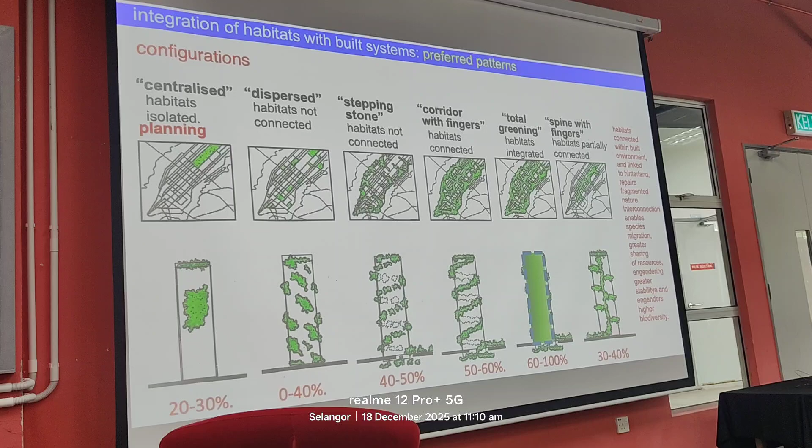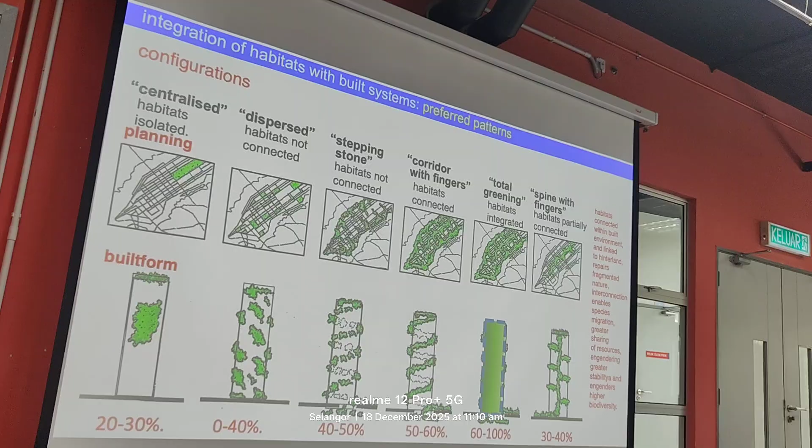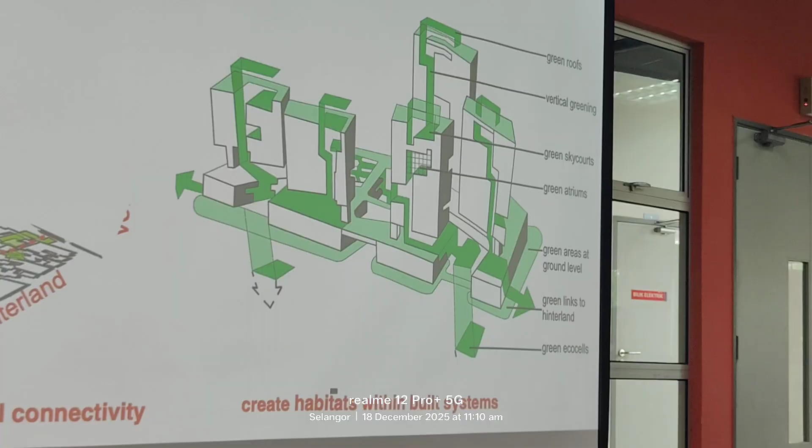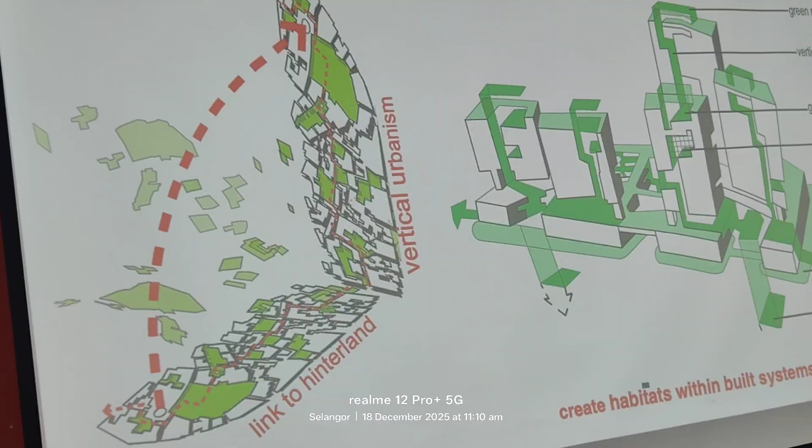And then within the buildings we create habitats as well. Green walls, vertical green areas, green skycourts, and so forth. But connectedness is very important, so we should try to connect the greenery both at the ground plane and with the vertical. So in nature, everything's connected. What human beings do is that we chop up nature, we fragment it.

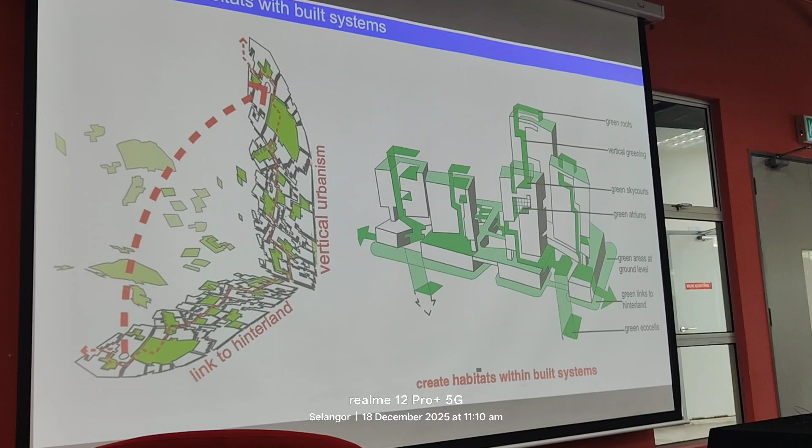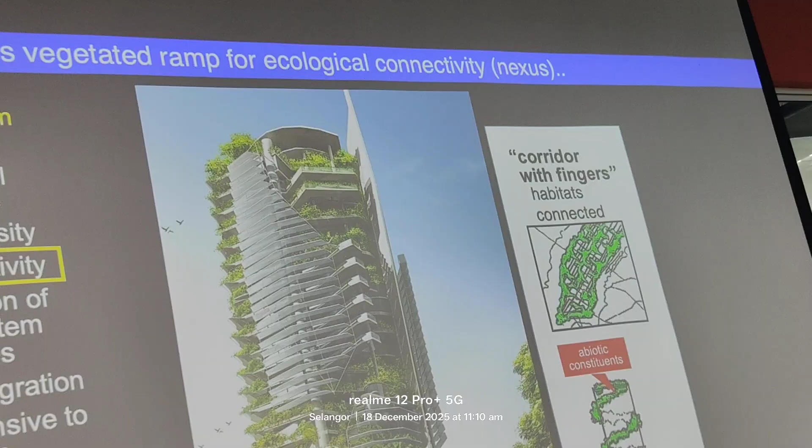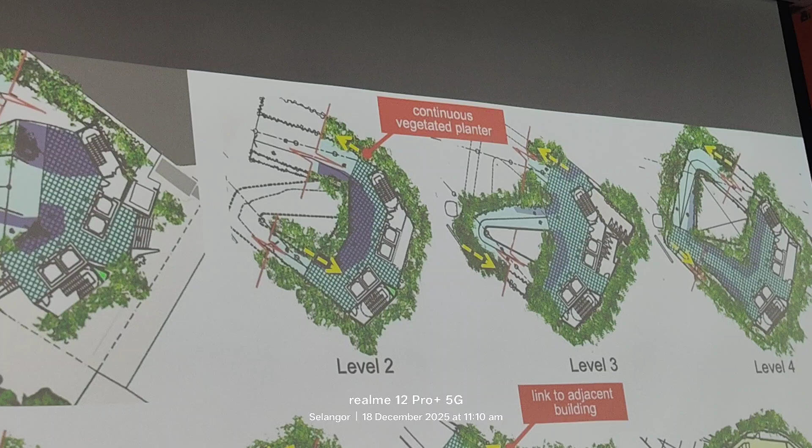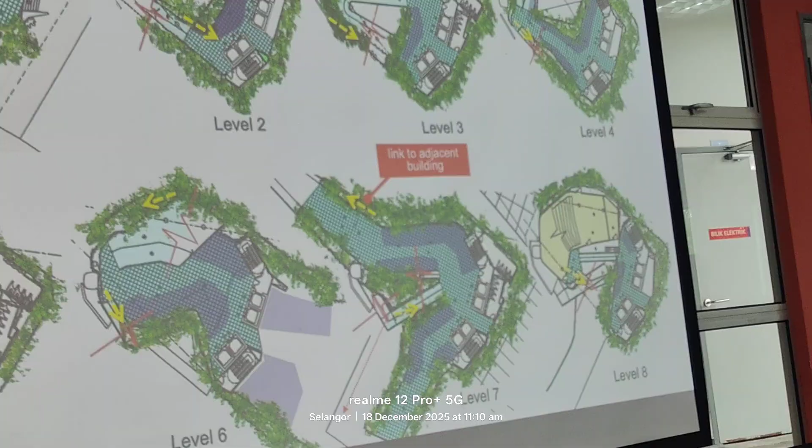And so with these ideas, I started to design experimental buildings. This is the EDITT Tower that we designed in Singapore. It's not built, but it started to look at connectivity, how vegetation could be linked within the building. These are the plans of the building. The idea was to have a vegetated ramp that goes all the way around to the top of the building, and in between would be the usable spaces. We designed this as a cultural building with museums, with exhibition areas, with cafes and restaurants.

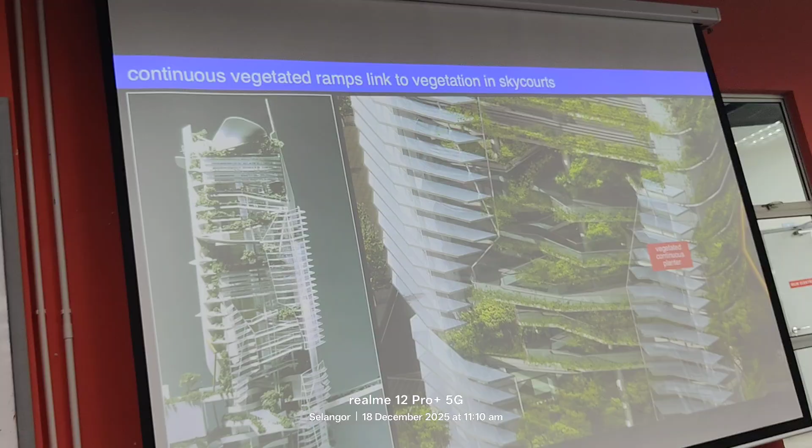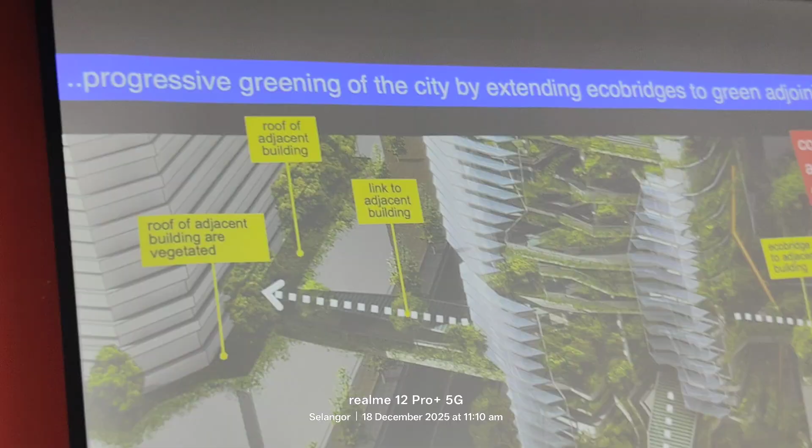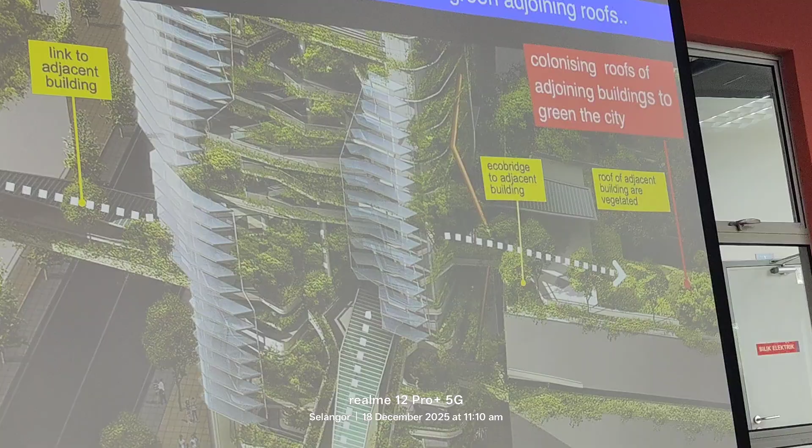And this is the model that we built. The idea was to have sky courts within the building, and as the ramp reaches the level of the adjoining building, we bridge across to the roofs of the adjoining buildings and we green it. So this was the idea of how to green the city. But it's just an idea, it was not implemented. In PJ, we designed a data center. Here we had green walls that climb up the facade, go around the sides of the building to the back and down again.

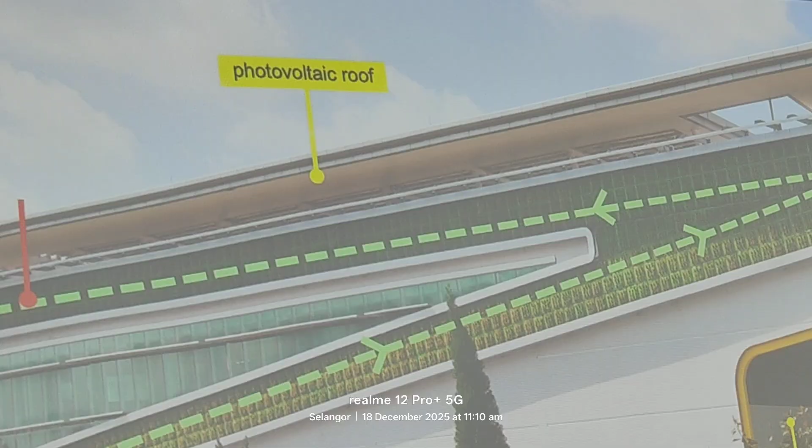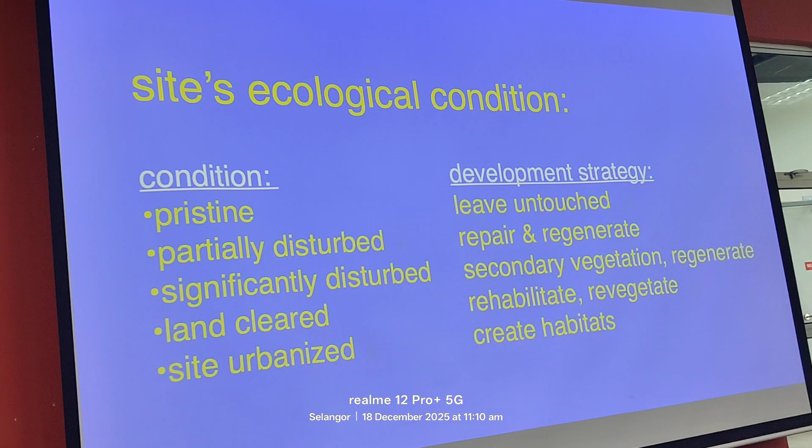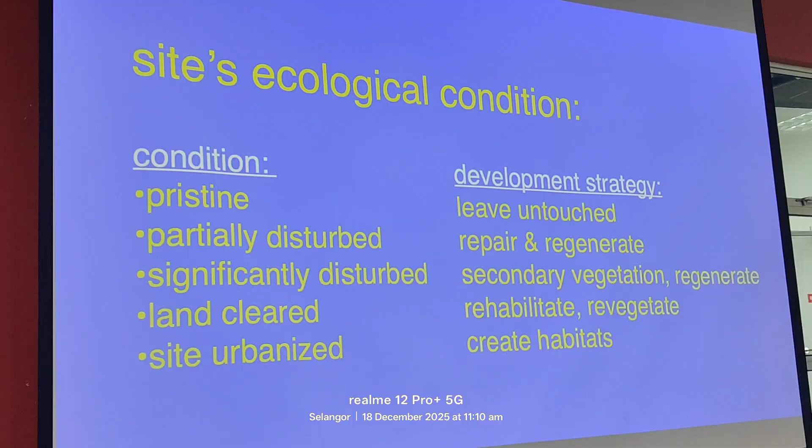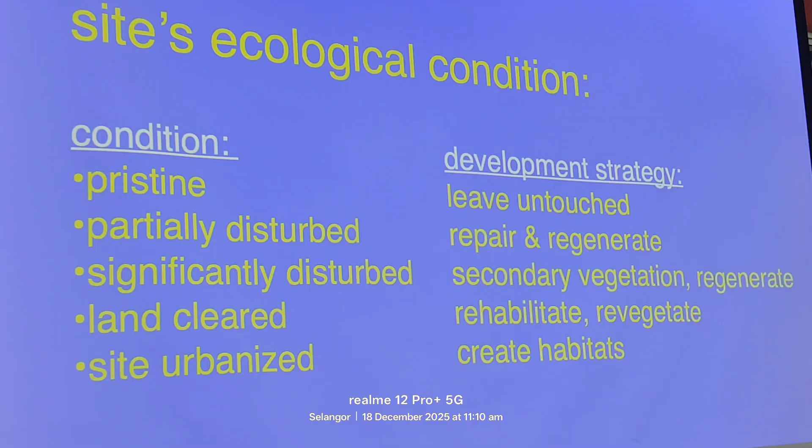Now, when we design, we look at a site. We ask, what sort of site is it? Is it a pristine site? Is it partially disturbed, significantly disturbed? Has the land been totally cleared? Is the site urbanized? If it's a pristine site, like a primary forest, we should leave it untouched. If it's partially disturbed, we should repair and regenerate. If it's significantly disturbed, sometimes we have secondary vegetation, we should regenerate. But if the land is totally cleared, we have to rehabilitate and revegetate. And with the urbanized site, like in a city, we should create habitats within the site.

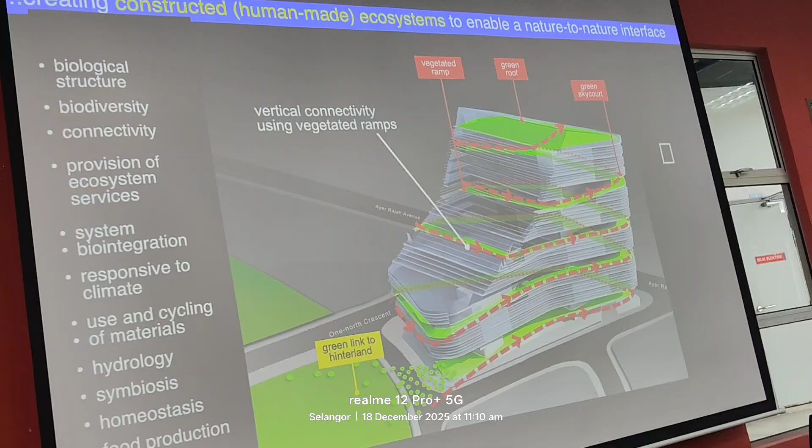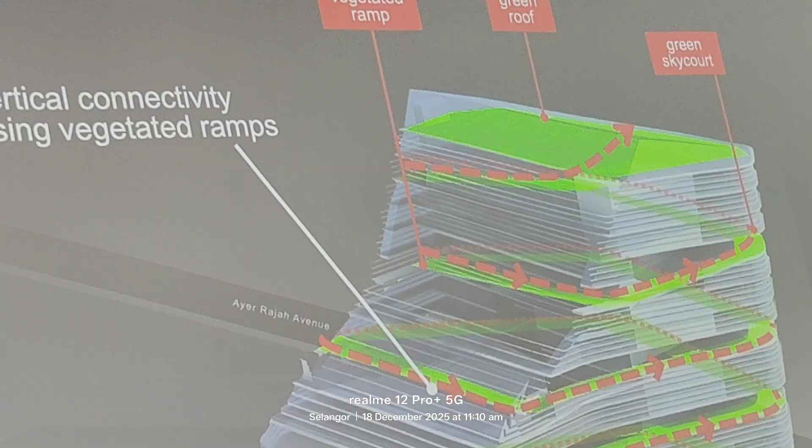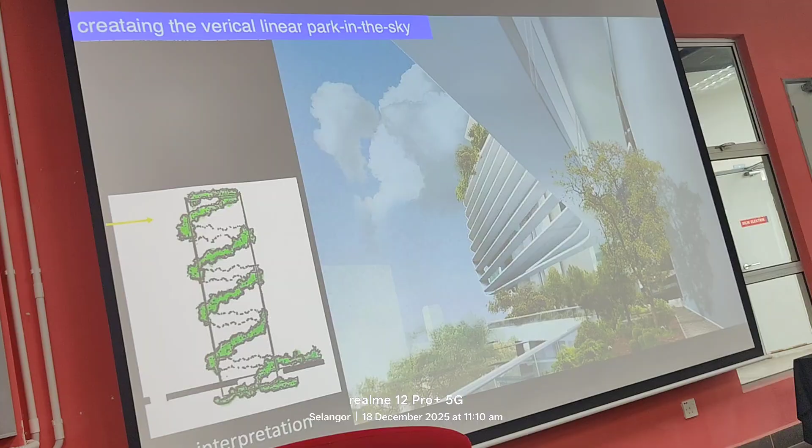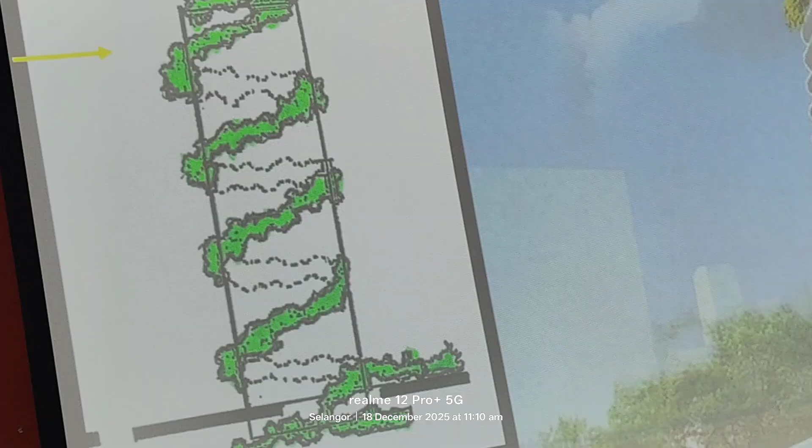So the idea of a ramp building with ramp vegetation was an idea that intrigued us. The idea was to have a ramp that climbs one floor with every facade, and in this way reach the top. This was our conceptual drawing that shows the ramp and the vegetation on one side that goes all the way up to the top of the building. Now this walkway is important because with many of my colleagues who do vegetated buildings, you cannot get access to the vegetation. You have to go through the user spaces, and that irritates people no end, and it's very inconvenient. So we put the vegetation as a ramp, and next to it is a walkway so that you can service it.

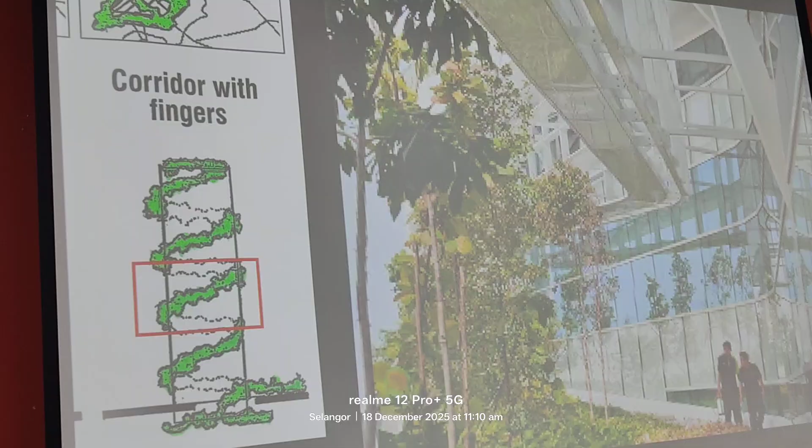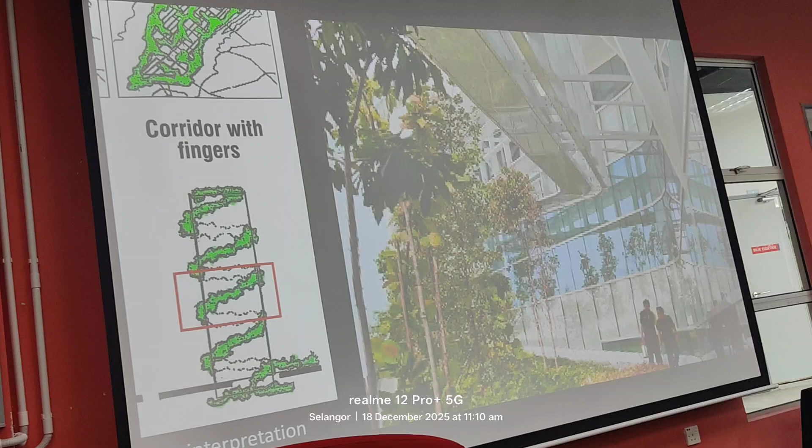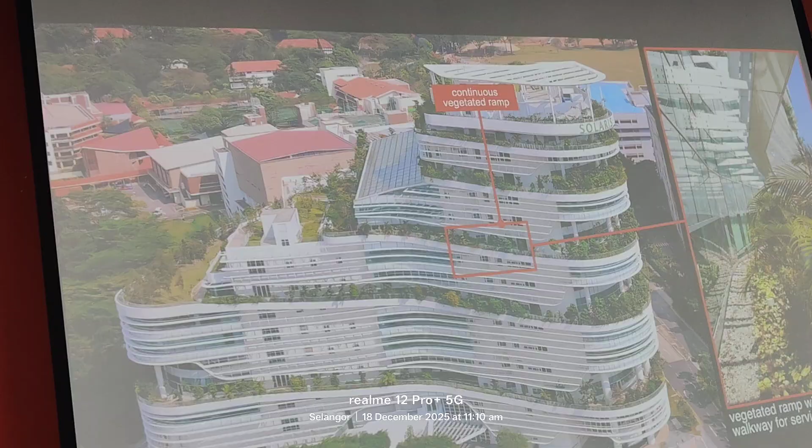And so here it is completed. You can see the walkway, people servicing the building. This is user space on the inside. This walkway, if you stretch it out, is 1.5 kilometers long, so we call it the linear park. But it is monotonous, and what we did was to create sky courts at the corners, so that the corner would open up into sky courts. And the plants are not decorative; plants absorb pollutants from the air, and they try to remediate the pollutants in the air. And so this was one of our early green projects. This is built in the one-north district in Singapore about 10, 15 years ago.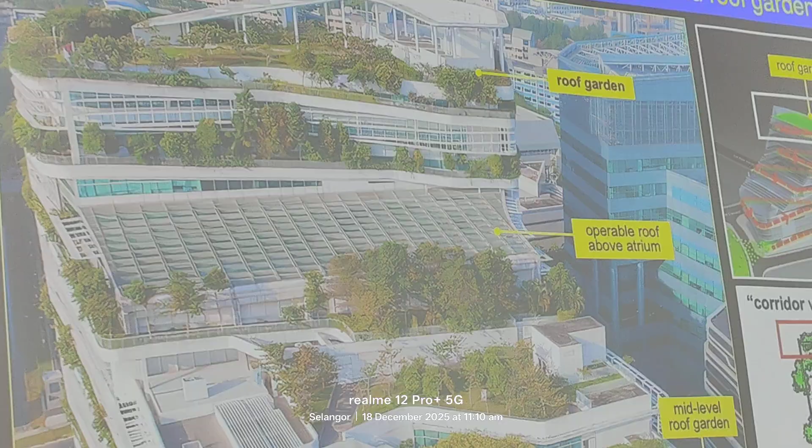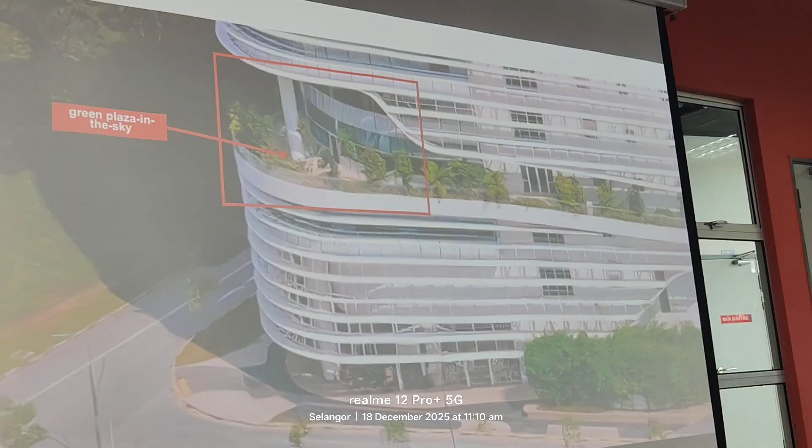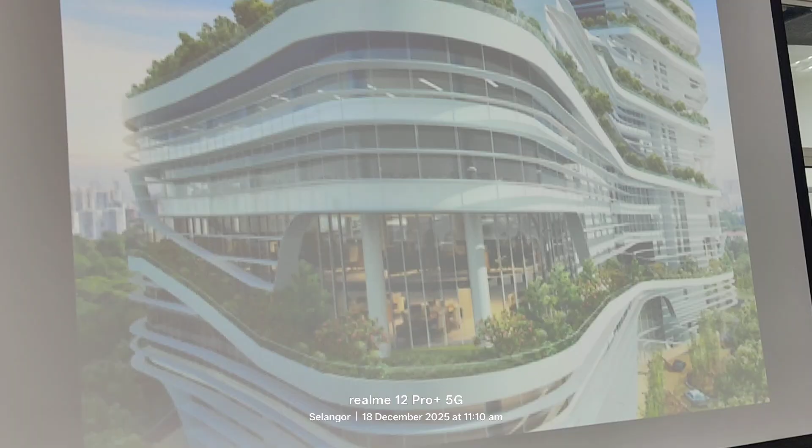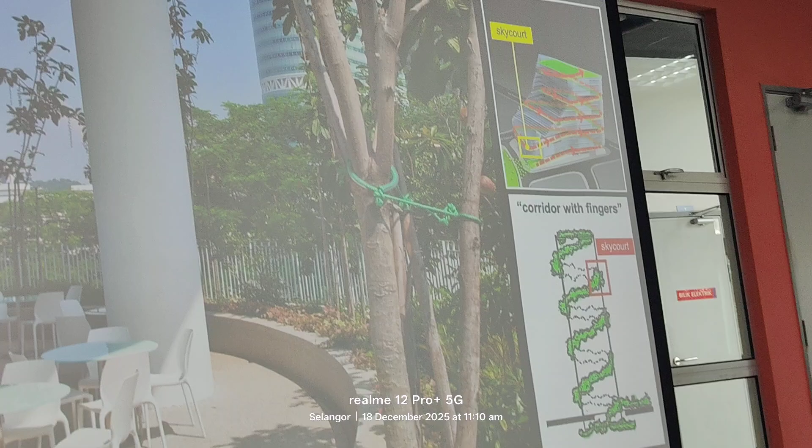Then I have a series of mid-level gardens. This is the mid-level, and this is a roof garden. And between the mid-level and the roof, there's a series of about 4 other gardens, and it's connected to the ground and to the adjoining plots. These are the skycourts. This is where you can go out to get fresh air, you can look out, you can have a meal there, have a cigarette. These are skycourts at the corner of the building. And then we bring the vegetation on the right-hand side all the way down to what we call the eco-cell, and all the way down to the basement where we have a living machine or a bioswale to bring the water back into the ground.

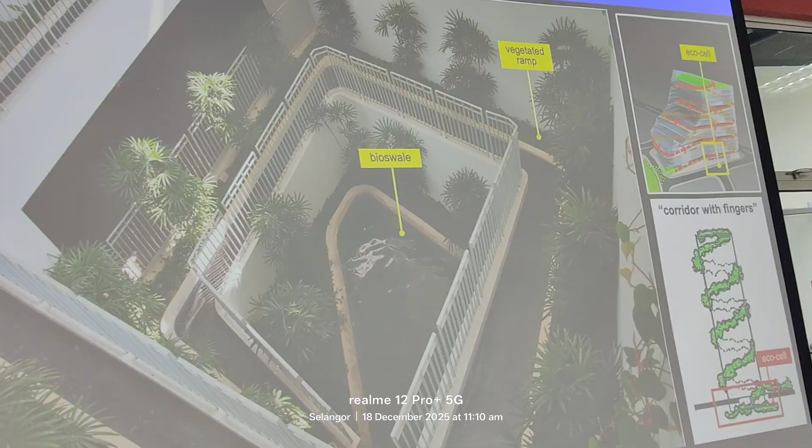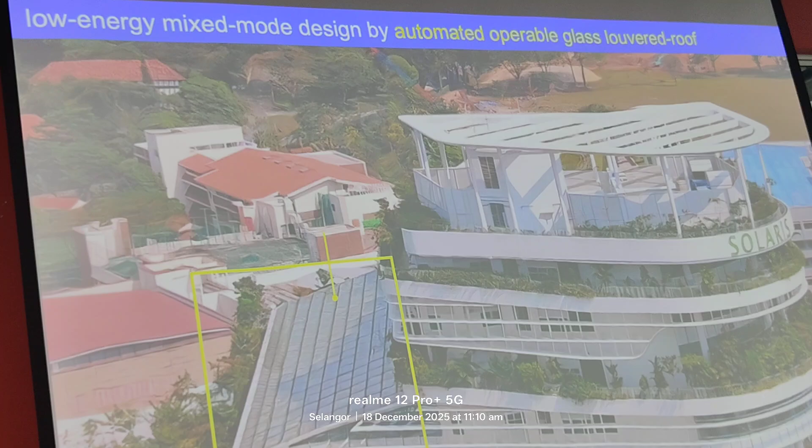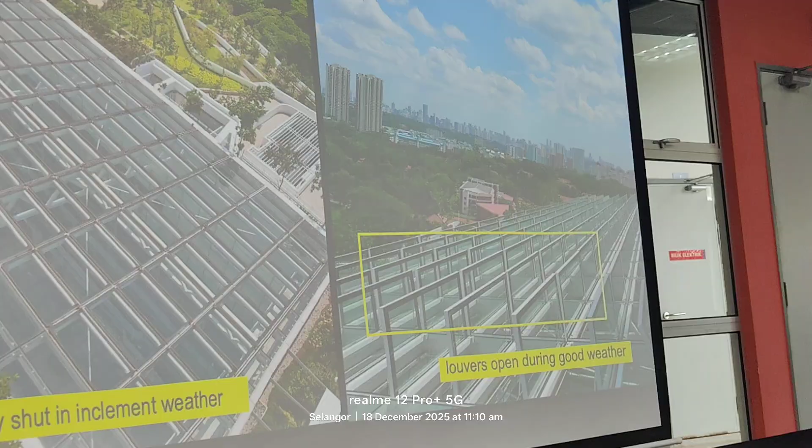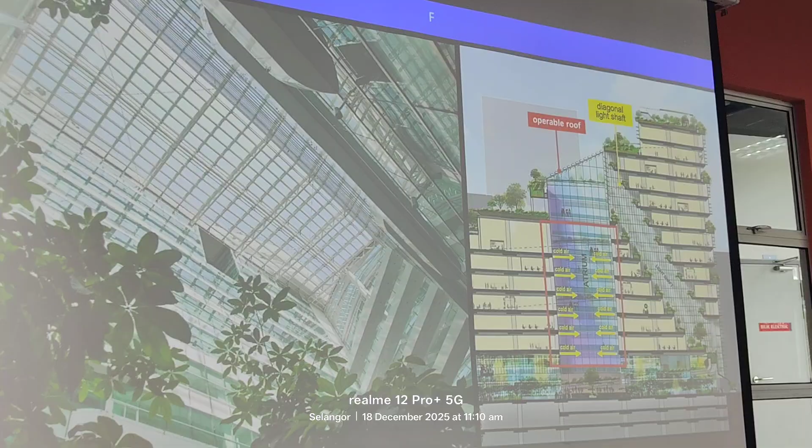But the building is actually 2 blocks linked by an atrium. Above the atrium is a glass roof, and on a normal day, if it rains, the glass is closed. It's automated so that when it's not raining, it opens up. You can see on the right-hand side the windows open up, and this is looking up at the glass roof. And on the right-hand side, in the red box, is the atrium. The atrium is not a fully air-conditioned space; just cold air is blown into it.

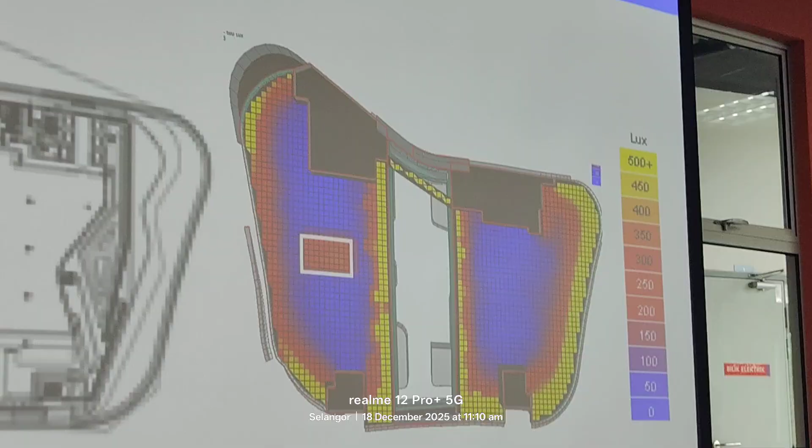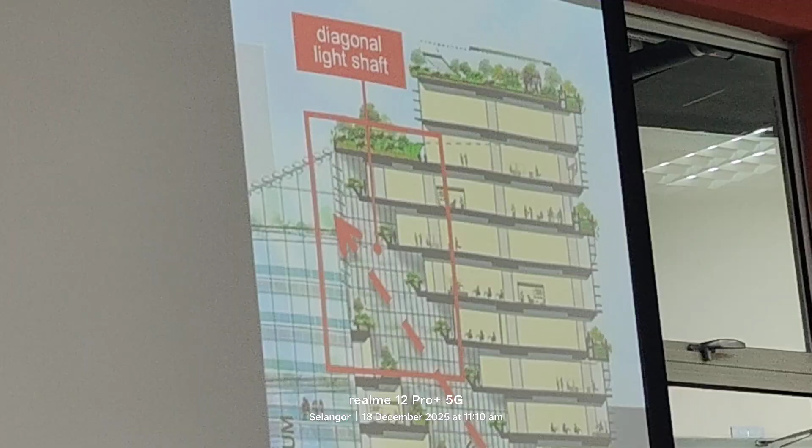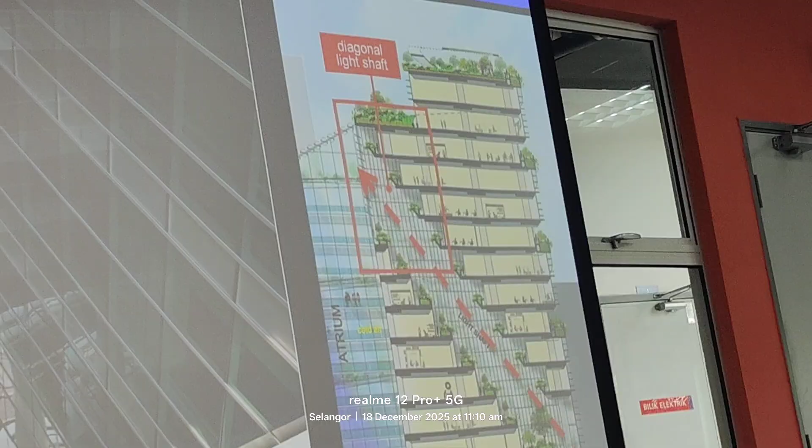This is a simulation of the daylight entering the floor. Not a very good design because the floor is too deep. In Germany, no desks are more than 7 meters away from the glass, so most buildings are very slim, about 14 meters from glass to glass. Here I have more than 40 meters, which is not ideal. I should redesign it. But there are some experiments here. You can see the white square is a slot that cuts all the way down to the bottom. I call it the diagonal light shaft. On the left-hand side is the view looking down the shaft to the street level. This brings daylight into the inner parts of the floor plate. And from the lower floor looking up, this is what it looks like.

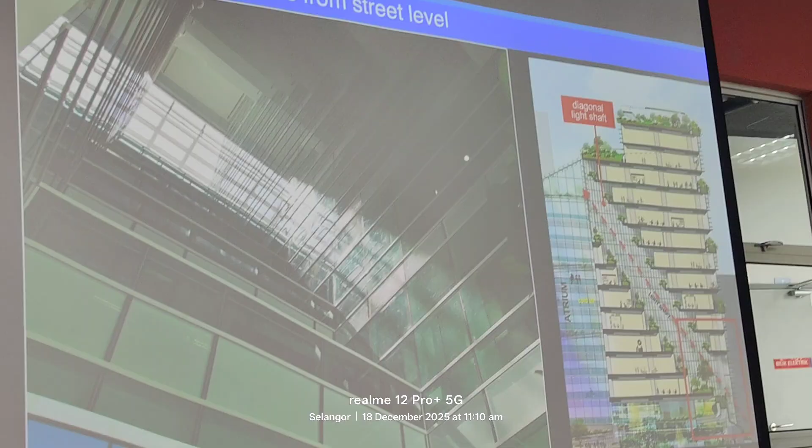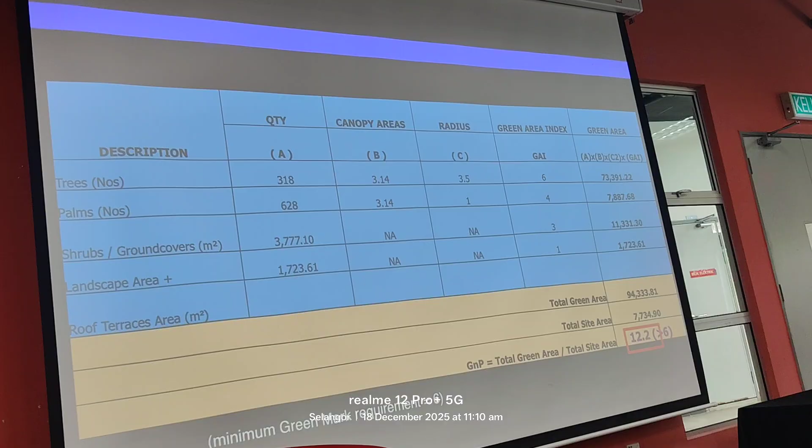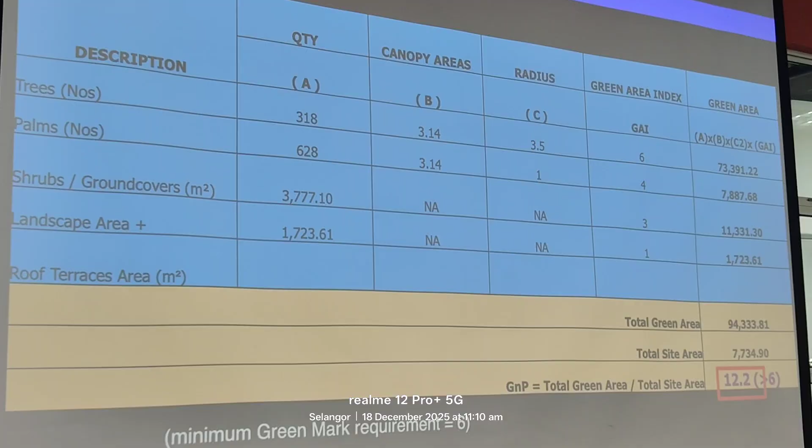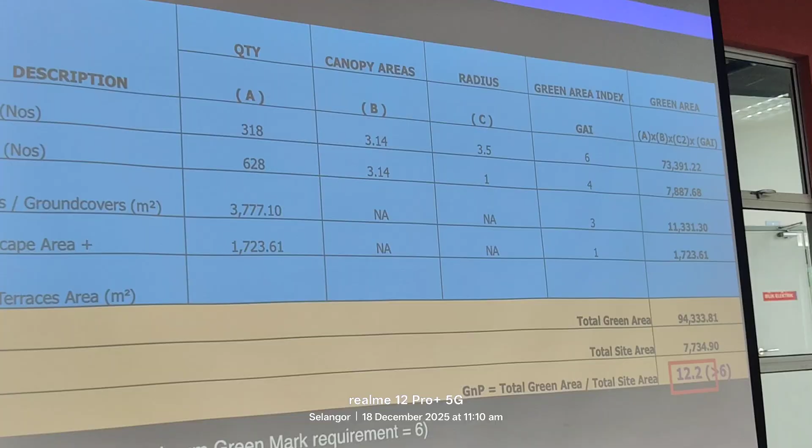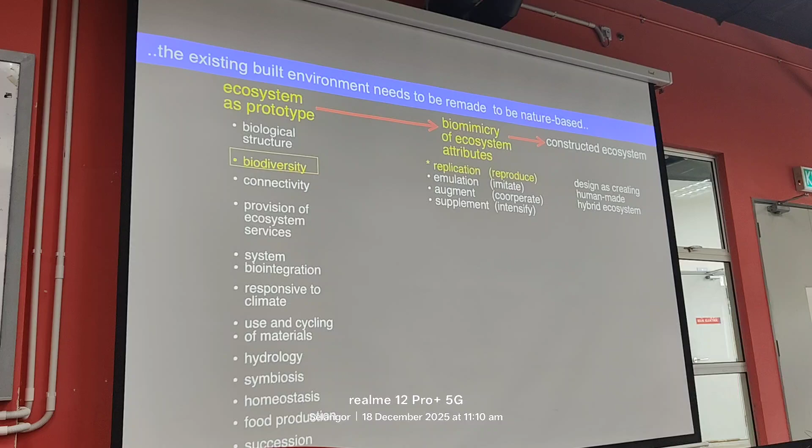So now, biodiversity. In the design we tried to see if we can enhance the biodiversity of the site. This project is in Putrajaya, and the land has been totally cleared.